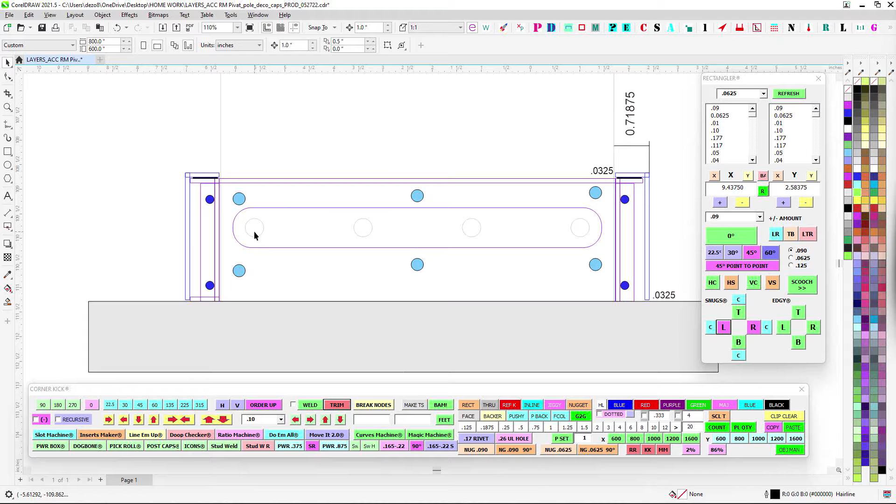All right, so here's a quick one for how I see it. Going to run this by you, see if you like it. So blue will be the overall cap. Purple will be the part that gets stuck to whatever that beam thing is. Here's your 8-inch beam right here. I've got the screws laid out, 1.5 to grade, and sort of how the picture is, not really spacing, whatever.

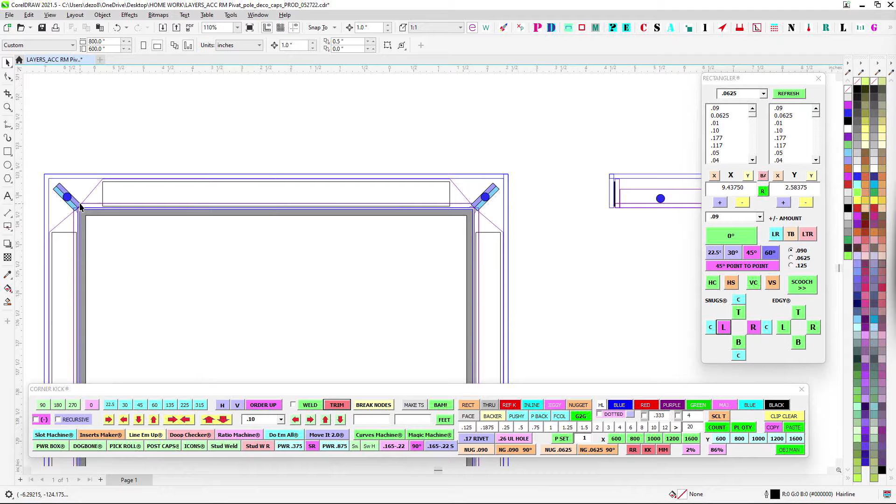So what we'll have is like these pieces. Here's how I see it. 090 pieces just bent up like this. And then selectively, depending on which location, they'll be riveted together at a 45. So it'll look like this. So we'll have this piece here at 45, throw a rivet, and it'll go across and then come along to this side. And then what we'll do is we'll have a cap, a one-piece cap that will come down and just attach like that.

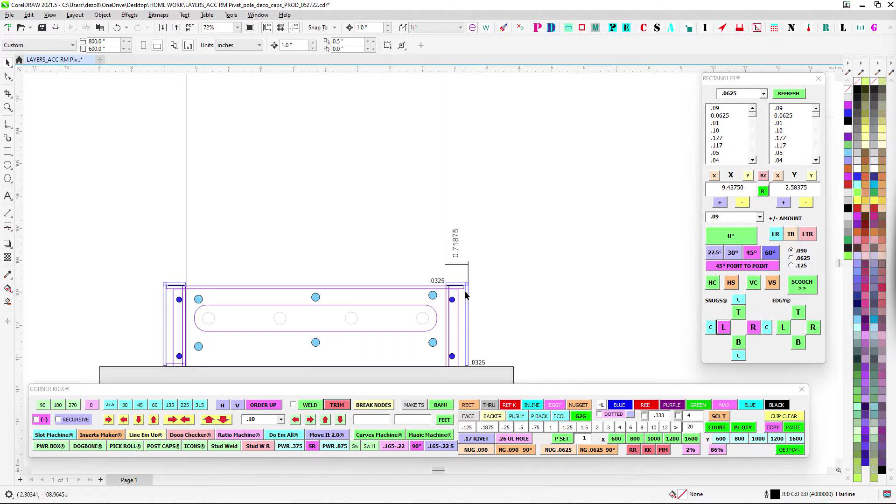I'm thinking we use the 5925. That's the 3M stuff. This is the UL rated, 500 pounds per square inch. I have a feeling that once we get that stuck on there and get a good bond, I think it'll take a sledgehammer to get those off. We'll have plenty of clearance for screws.

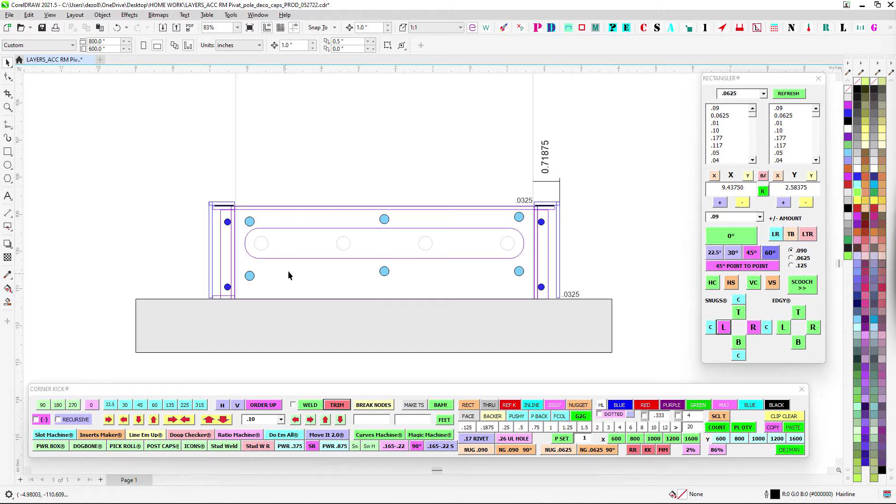Overall, we're looking at 0.71, but I am leaving a 0325 if you think that's enough between everything, basically. I know this will squeeze up against if we screw it down. I have the holes staggered, and they don't have to use every hole, just depending on which hole they want to use, install's choice. It will go against the ground, so it's sort of self-leveling, but I also have an 032 here as well, 32nd, if you think we need more or less, but we don't want it to bottom out before it hits tape, plus a little drainage or something.

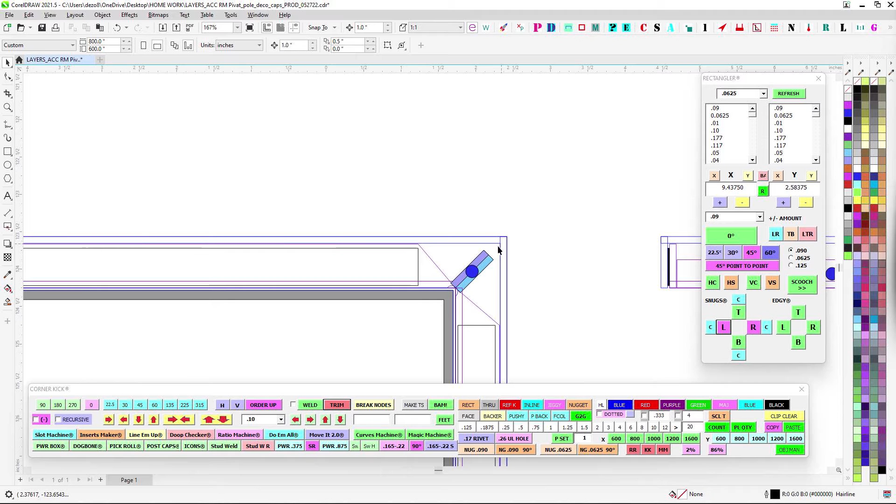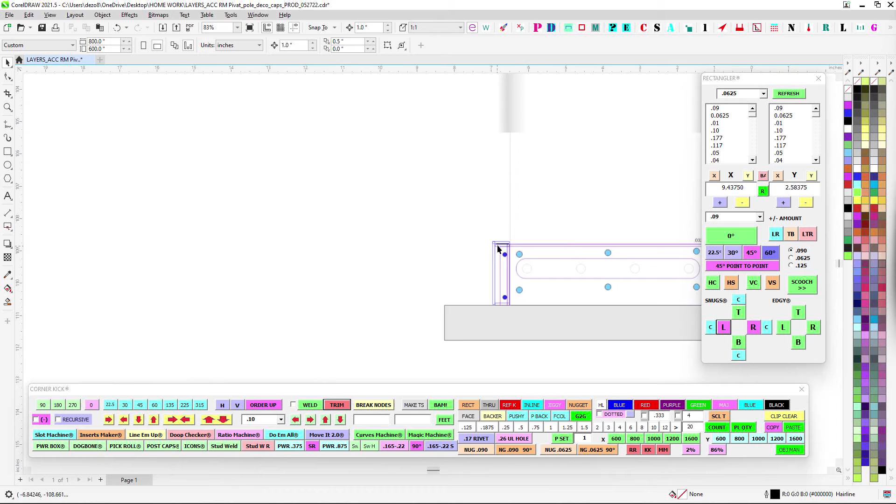So, like I say, from a top view, it'll look like this. We could even weld this together on the inside, and then that way it'll bring this seam together. And then what'll be nice is with the one-piece design, we'll have a nice safe bend across the top. And then all we'll have to worry about is rounding off this corner, and then just rounding off and safetying off the corner edge once it's all stabilized. But again, this should give us enough room to do what we need to do.

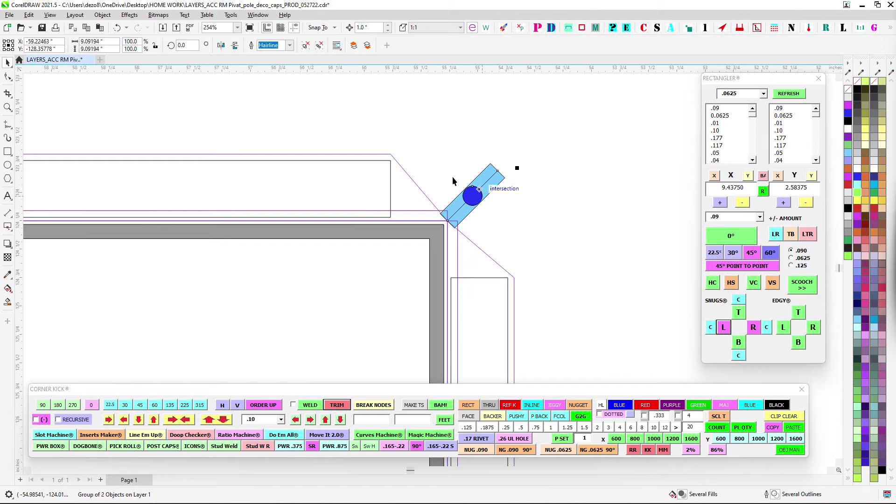So the way I see it would be the 4x, they're the 4-sided. So in the shop, these will be bent at 45, riveted together, at least 2 pieces. So we could just bring these together like that, and then install can bring this in together like that. No need to actually fasten it here. Maybe you want to be fancy, you could take Clecos out there, just kind of hold it together, but then you nail it down. There's your exposed tape.

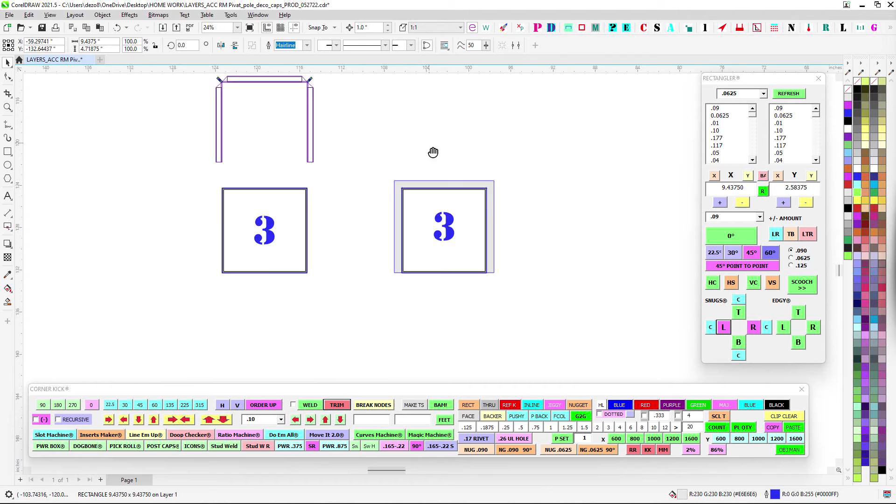And then I think the 4-sided one, this would be really the only way to bring it in nice is to do like that. And then we would go ahead and have our seam on the sides. But that way it's nice and stabilized, and just have to live with the seams. So the 3-sided would be similar, except this could be riveted together as one horseshoe. It could bend a little bit to get over the screws, but once it's in place, it'll be just like that. And then this guy here will just come in and we can slide it right on over. So again, got clearance there.

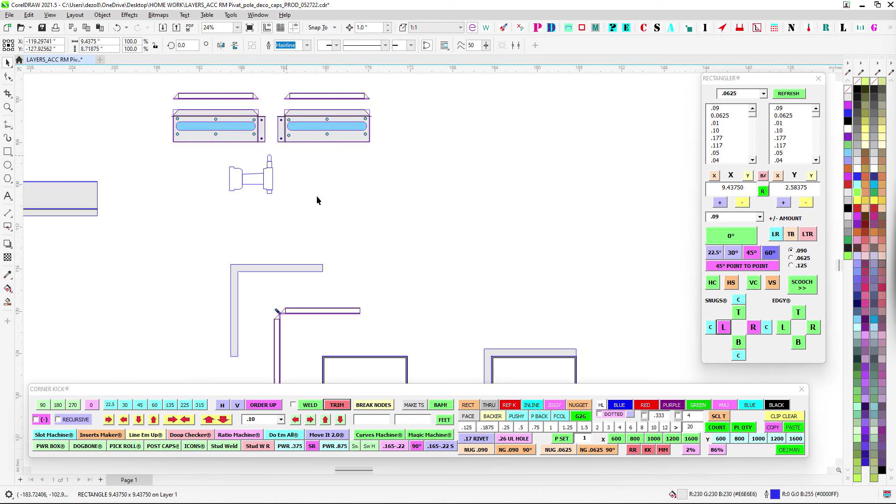Everything's looking good. And then the 2 is just that simple. We could rivet it together, make it all ready to go, bonk it against, and then it goes and dies flush with that. So I think that's a decent solution, if you think that's a good way to roll. If you see anything, hit me up. But otherwise, this should be ready to go if you like it. So just, clearances, things like that. Just let me know what you think.